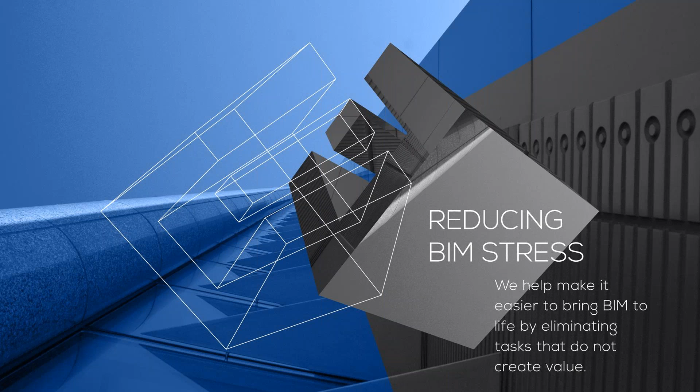The main focus of our company is to create software for continuously accelerating BIM based on the experience of the most advanced users, and with those solutions we're reducing BIM stress by eliminating tasks that do not create value. How do we do that? Today you will see two different examples. One is pretty new: openings for the structural framing category.

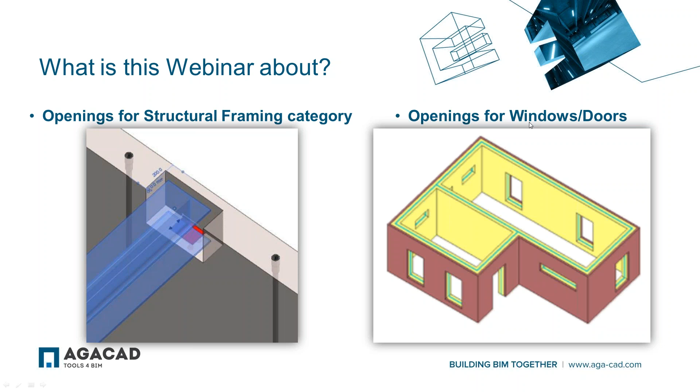We are cutting the edge of making things in BIM. I will also show you the workflow for openings for windows and doors when you have two different models, structural and architectural. Today I will use only one of our solutions, but it was just updated a few weeks ago, and you will see the brand new features.

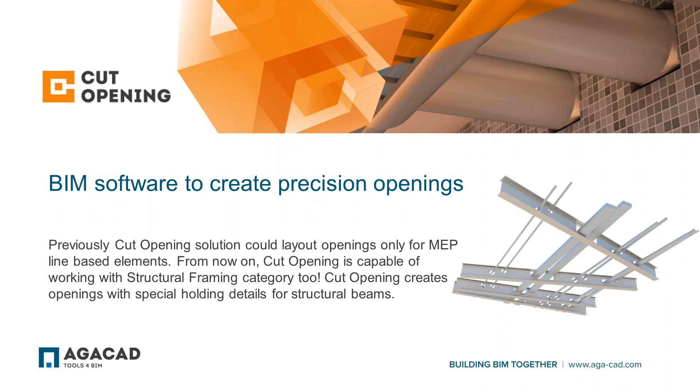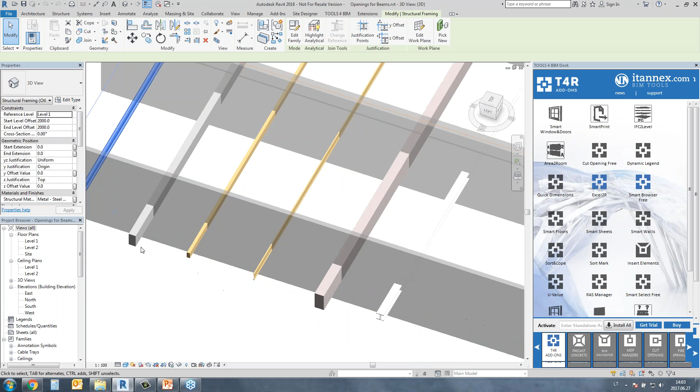I don't want to speak about everything literally, so I'm just jumping into Revit, and this is what we have. Right now I have a model that consists of several walls and different combinations of beams. At the first position you can see that I have different beams: metal beams, concrete beams, some wooden beams, steel beams, etc.

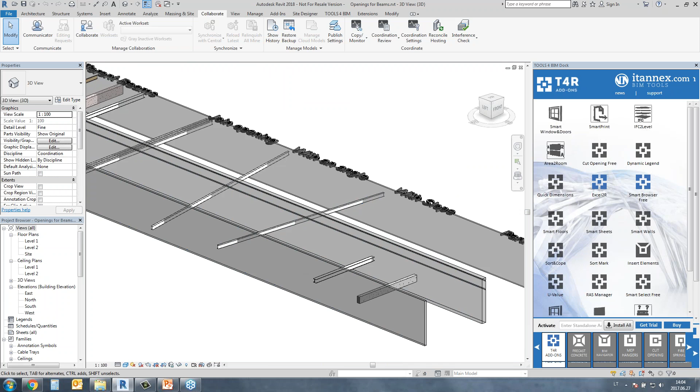So different beam combinations. Again, I have beams that are near to each other, so I would like to join the openings for all of them. I also have some inclined beams, some sloped beams, as well as some beams that have partial interference.

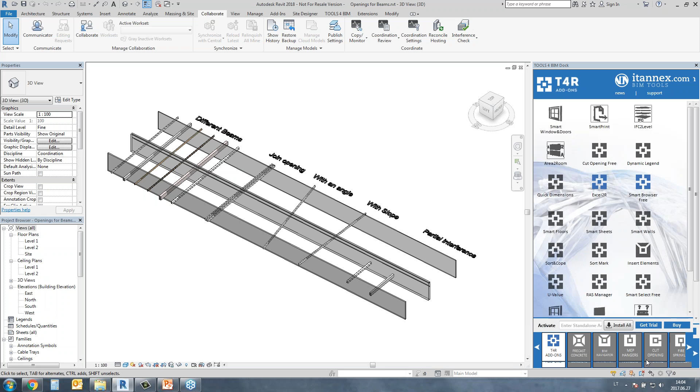That means they are not going fully through the walls, but they are just reaching the wall, and I have to place the beam over there, and I have to place the openings for this reason. So in this case, AGACAD has developed the tool and feature in Cut Opening to place openings for beams.

So the workflow - maybe some of you are familiar with how Cut Opening works, and somebody is not familiar. So I will repeat everything step by step to make sure that you can try it on your side. The very first step is to run the interference check between walls and beams.

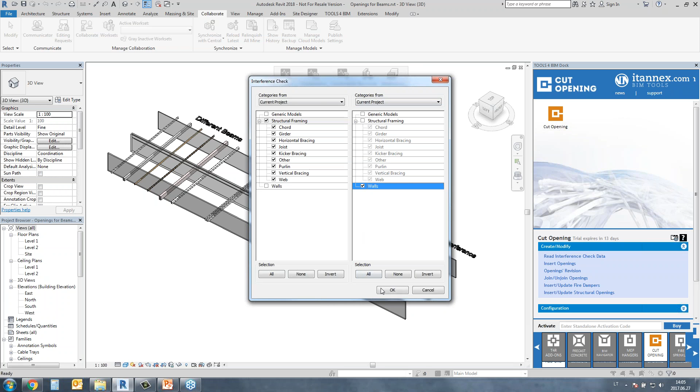I'm using Revit's interference check. On one side I'm choosing structural framing, on the other just simple walls. I'm running the clash detection, and if I select something, you can see in the model that those elements are highlighted. I'm simply exporting everything as an HTML file, which Revit gives to us, somewhere onto my computer.

The next step is to prepare the configuration side. In the configurations, we have different line-based elements for which we can open the openings: round and rectangular ducts, pipes, different pipe systems, cable trays, conduits, and the last one, but not the worst, is the beam. This is a brand new feature to place openings for beams.

Inside the configurations, we have three different possibilities. The first one is the cut offset, or to be exact, the opening size. We have two different methods of applying a size for the beam opening, and the first method is to apply cut offset.

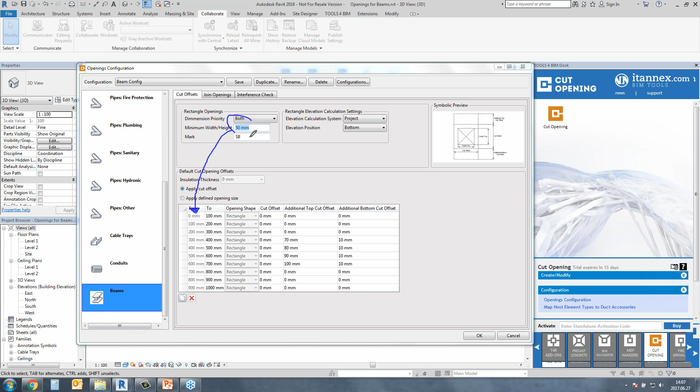The openings will be started only from 50 mm, when the beam is bigger than this size. So you can do some configurations about the size of the beam.

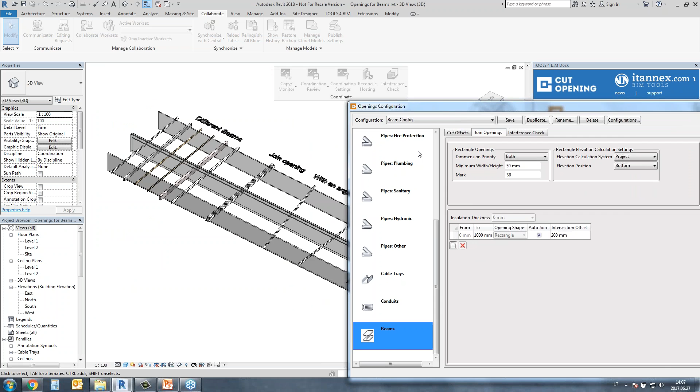Another thing we can do is joining openings, as I showed in one of my examples here. We can auto-join an opening for several beams that are near each other. This is the size, same idea - you can add some sizing if needed, and ask the software to auto-join the elements if they are near each other by some distance.

The last one is interference check, for when a beam is just touching the wall. The question is, should we make the opening for such situations or not? Another thing we can suggest is the depth offset - the opening could just go to the end of the beam, or it can be extended deeper into the wall. Such configurations can be made inside.

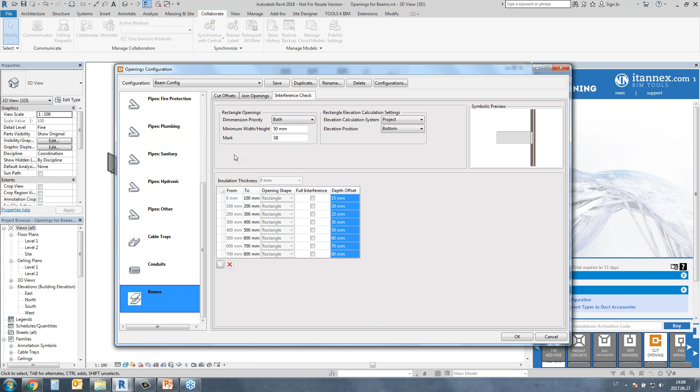The configurations can be saved. As you can see, I have lots of different configurations for different situations, and I'm just saving the beam configuration.

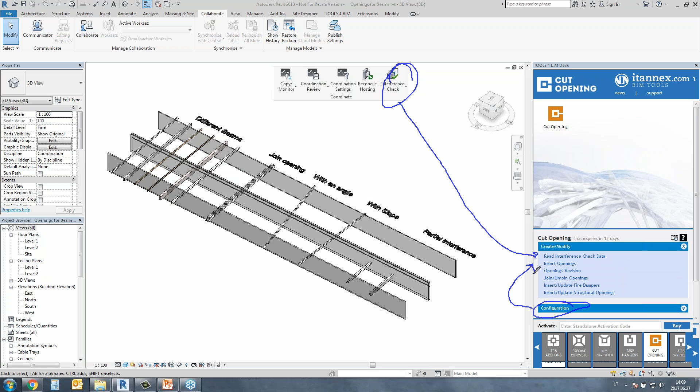The third step is to combine those two things - I'm combining the interference check from Revit and the configuration from AGACAD cut opening, using the simple read interference check data possibility. I'm selecting the HTML file taken from Revit clash detection, and taking our beam config from the cut opening.

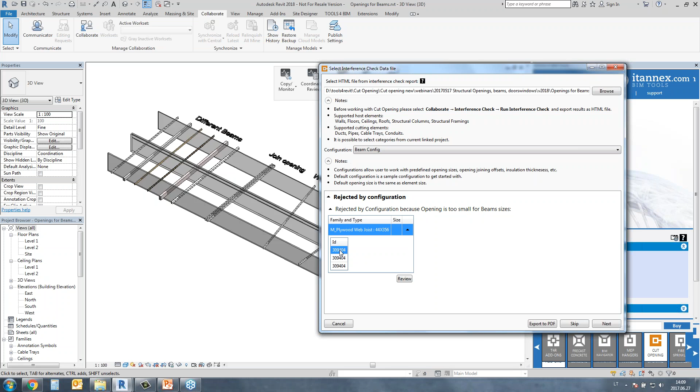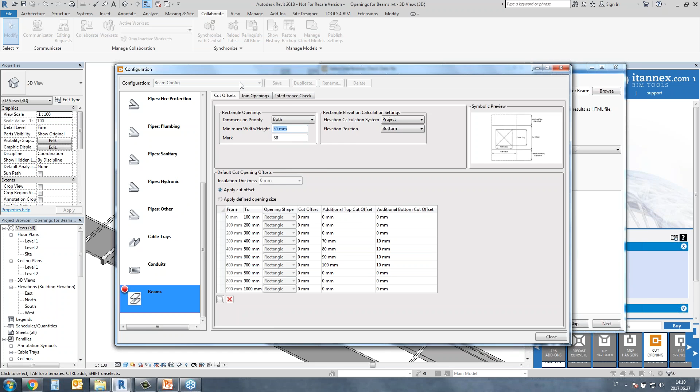Automatically it detects the elements that can be rejected by configuration. As you can see, this one is rejected because it's too small for the opening. It cuts everything and shows you where you're having problems or troubles, so you can review it and go back to the configuration to check some red bubbles that lead you to certain places. This 50 mm mark indicates that the element is too small for the opening to be placed.

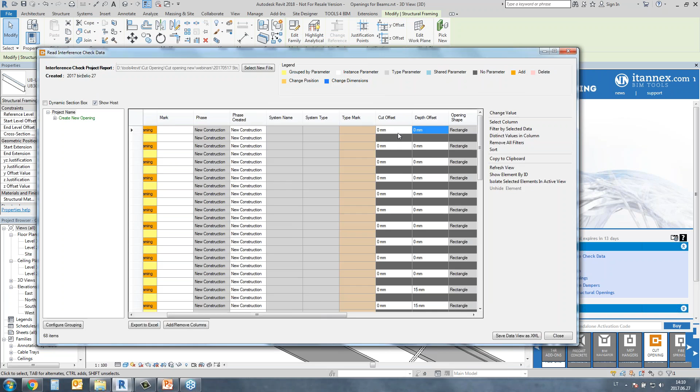I agree with this rejection, so I'm clicking next, and I get some values. Right here I have the table where I can specify the size once again if the cut offset is okay, and I can still see the elements inside my Revit - my Revit is still working. Let it be like this.

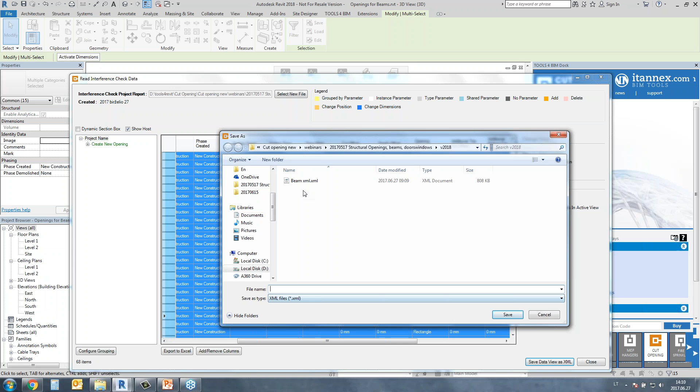I don't want to change anything here. I just want to leave the cut offset at 0, and the depth offset at 15 mm, as it was made in our configuration. So I'm saving this as an XML file, combining two different materials - one is interference check, another is configuration. I saved everything, and now I'm going to insert openings for such elements by taking the XML file.

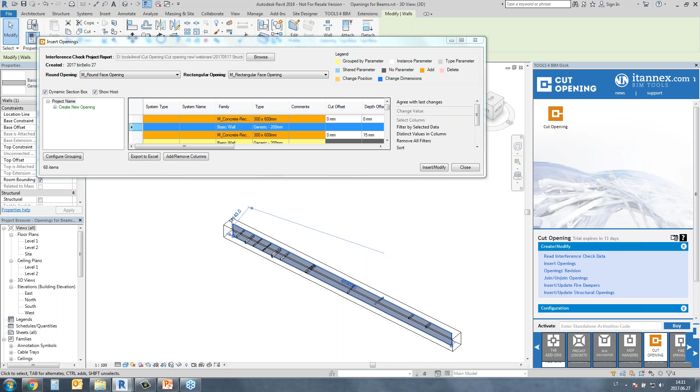Once again, I have the possibility to take a look at my elements that are clashing somewhere. So I'm taking this element and I see the clash. I'm taking another element and I see the clash. I'm taking the third element and I see the clash. So you can just review all the clashes.

There is a possibility to change the cut offset depth and all the possible material in this table. As well, you can choose the family. In my case, I'm choosing just the opening family, but as you saw in my example, the opening can have nested families inside, with some plates or handling elements that can be placed together with the opening. Those elements should be nested inside of the openings.

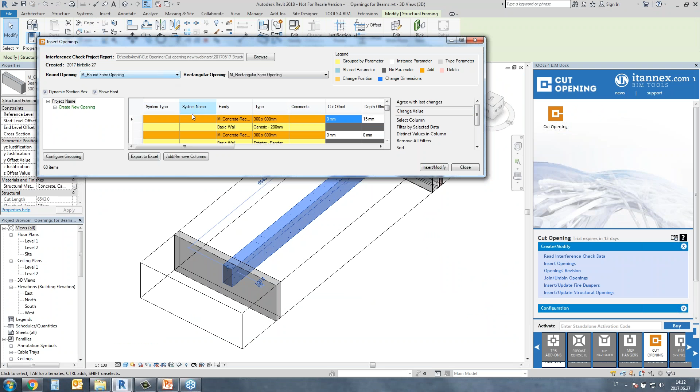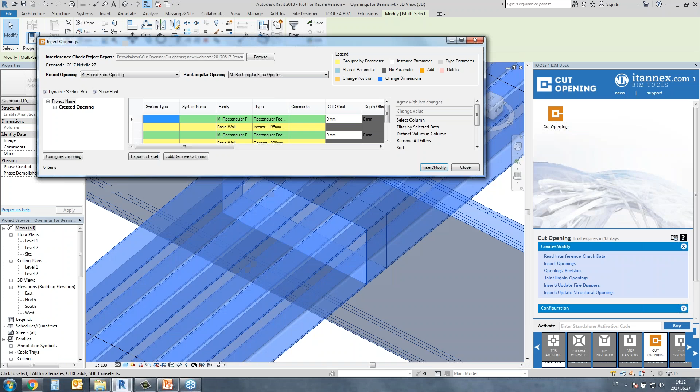After you've checked all the stuff over there, you can just easily press insert and modify elements, and the elements are inserted by the tool. So I have 32 elements inserted right now, and they are somehow auto-joined, and I'm clicking OK, and let's take a look how our solution did its job.

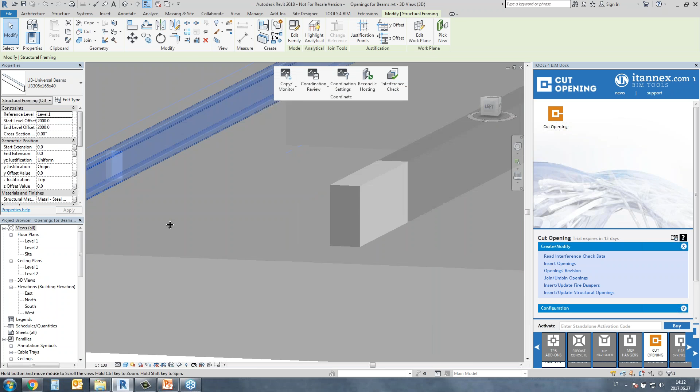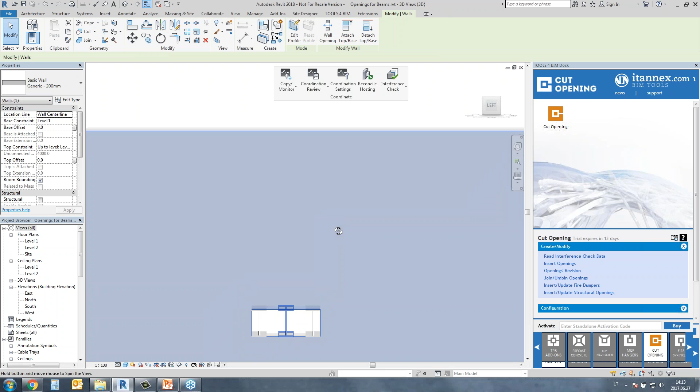So we have a metal beam. Inside of the beam we have some special parametrics for width and height. For the steel beams we're taking the width and height, for these elements we're taking just H and B parametrics, etc. As well, we have auto-joined beams, auto-joined opening for 3 beams, as you can see here. I can take this one and easily find that all of them have only one opening. The same situation is with the slopes, angles, and the last one is with the partial interference.

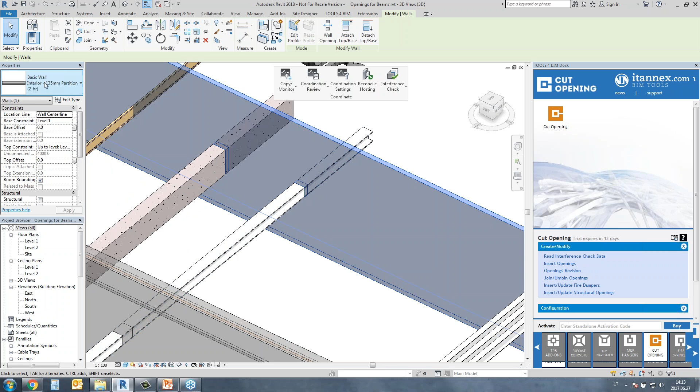That is the most interesting one for structural engineers, not for architects. All these elements, openings, are basically for partitions, they are for architects. But then it comes to the partial interference, we can see how it looks from the plan views.

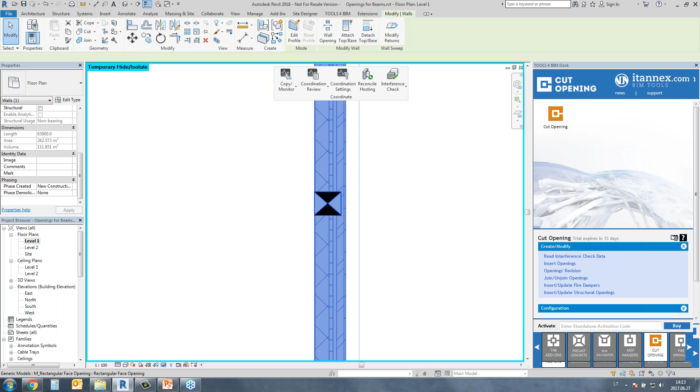You can see that we have the opening here. I can still manage some parametrics right here, like I can change the depth offset. As you can see, I can just hide this one. We have some markings over there. We have the marking over there again. So everything came from just our family, as you can see. So just you can use that.

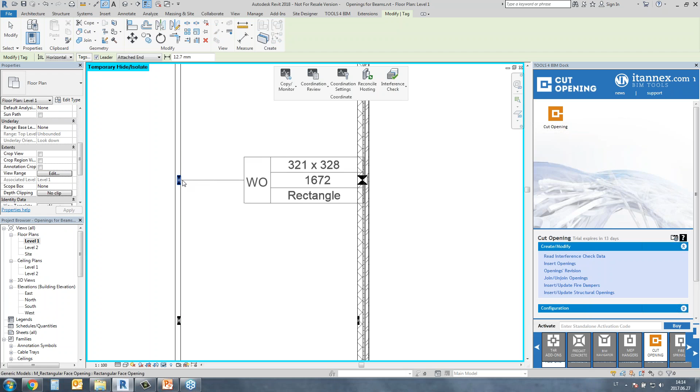What we can do more with those elements, we can tag them. So I have a tag, a wall opening tag, and I will tag those elements. So as you can see, what do we get here? It's the size of the opening, it's the elevation of the opening. This is a rectangular opening, and we have a marking that is WO, wall opening.

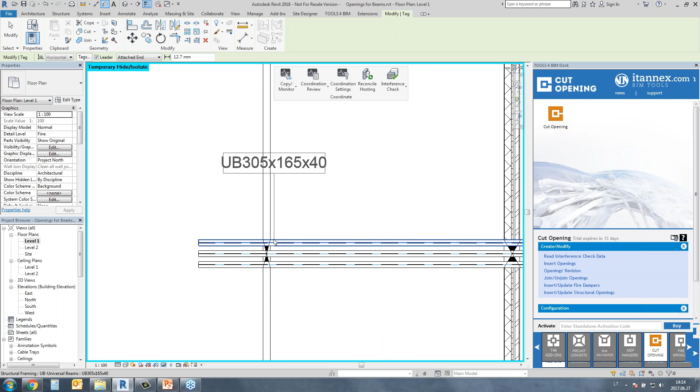Again, I can mark another one, and maybe that is, oh, not the one I need. Yeah, so as you can see, I have another elevation, another sizes, etc. So all these openings can be scheduled, can be tagged, and can be used in various situations that you have.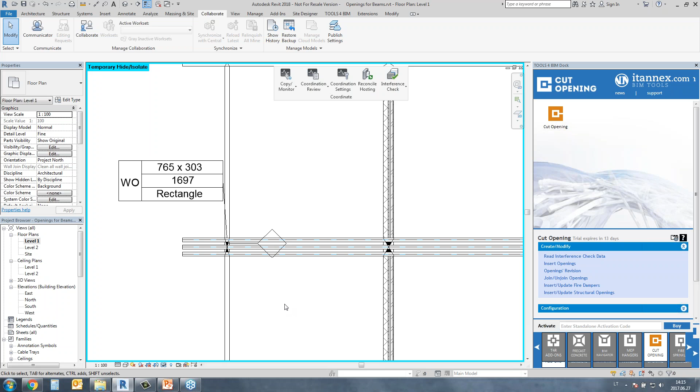The same workflow is applied for ducts, pipes, cable trays, and conduits, but today we're speaking about structural things and about the structural beam openings. So that is the final result, what you get. It's the openings for different situations for beams, the tags, and as well we can prepare the schedule for generic models.

We can take any parametrics from those generic models and use that here. As you can see, we have everything like depth offset, some family names, width, host, who inserted, what kind of configuration was used, the insertion date when the openings were inserted, as well the opening area, it's rounded so it shows 0, but it can be found. Opening elevations are calculated, the level where they are placed, etc.

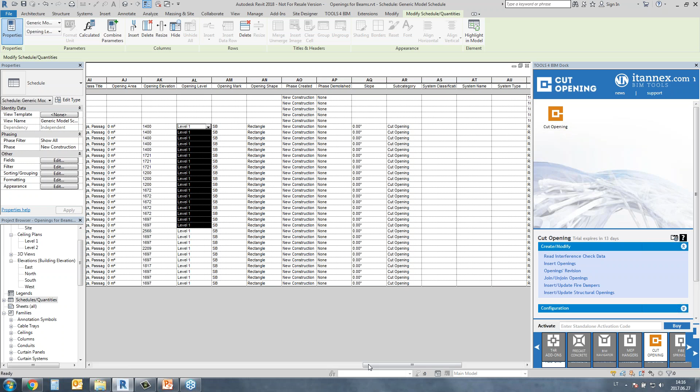So lots of information like width, type, are described. You can easily prepare your builder's work, drawings with tags, with schedules, and the drawings as well. So this is the first theme that I wanted to speak about. We already spoke about openings for structural framing category.

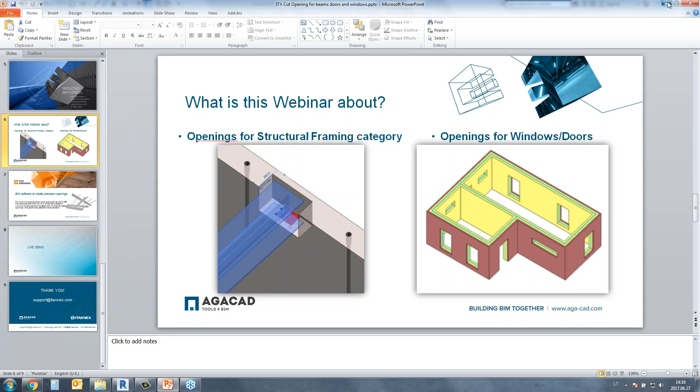Another theme is about openings for windows and doors. Then we have linked architectural model. Just one little thing that I forgot to say.

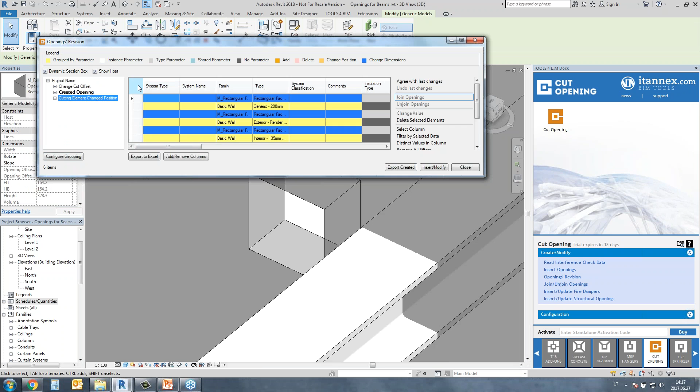For example, if you move the elements left or right, if you change the size of an element anytime, you can go to opening revision, and it will find that we changed something, so we can agree with the last changes, and all the elements are just popping back. Where is that moved element? Yeah, it's right here. Let's move it one more time.

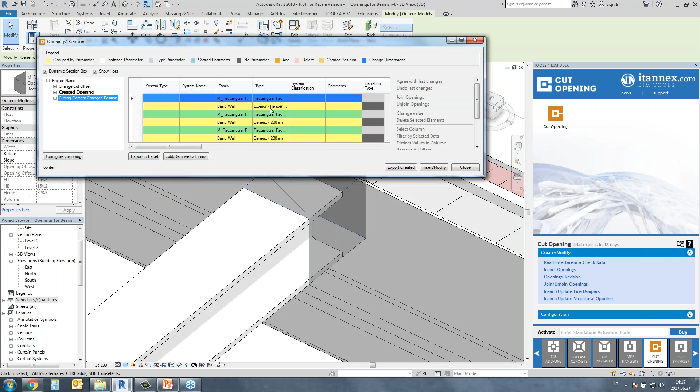I moved it here. I'm going back to openings revision. I have this one, I'm agreeing with last changes. Okay, voila.

Let's take a look where it is now. Yeah, so we changed the position. As well, easily we can use join functionality just to join the opening into one big opening, etc. So we have lots of possibilities here.

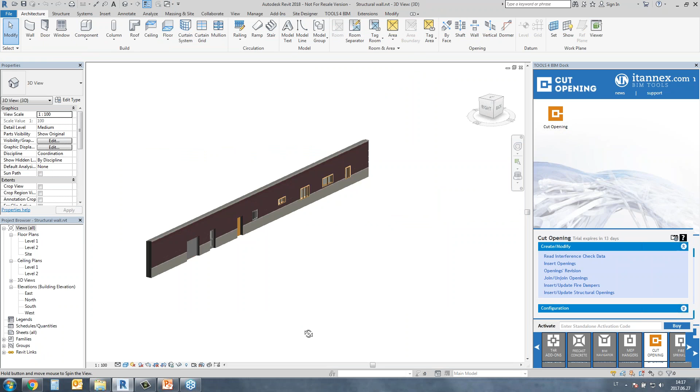And right now, finally, I'm switching to another project of mine, the structural walls and the architectural walls. So this is a bit of another theme. This theme is very popular in the Scandinavian market. I'm not sure about yours, but I feel that you sometimes have such projects, where you have the architectural wall in a separate file.

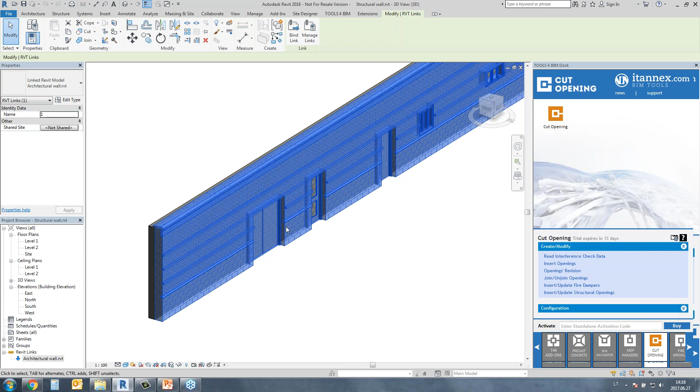As you can see, this is my Revit linked architectural model. And this model contains all the windows and doors, and on the other side I have a wall that is current, a structural wall that we as structural engineers are working with.

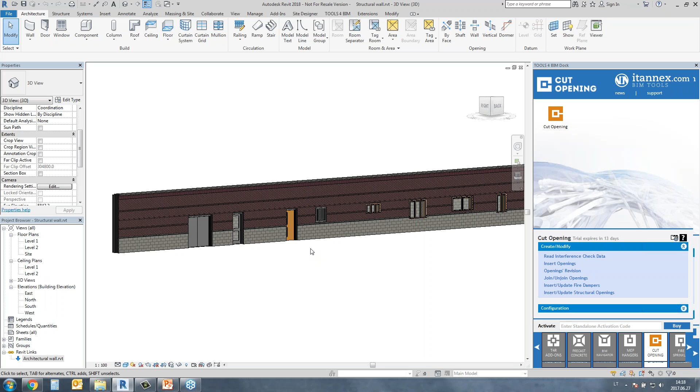So we have to have those openings for doors and windows, but then we have such a workload we don't have the openings here. So usually we just use manual work to cut openings all around the windows and doors, but today I'll show you one really nice example to insert structural openings for those elements.

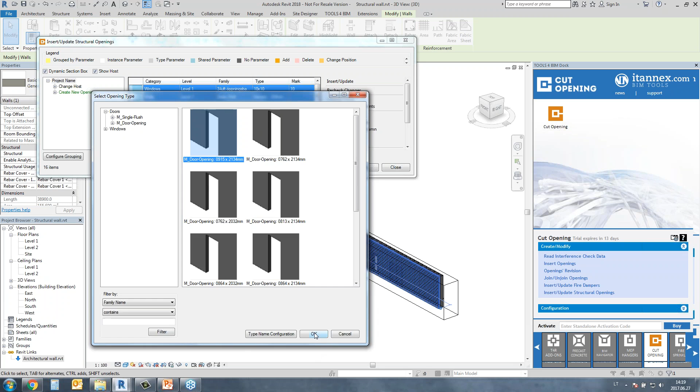So again, something similar, again the table that is highlighting elements inside of your project. So I'm taking all of them and I use the insert update feature, and I'm taking just a simple door opening that was created by Autodesk. It is in your structural or architectural templates. Those openings are placed, so they are not our families, they are your families, and I'm clicking OK.

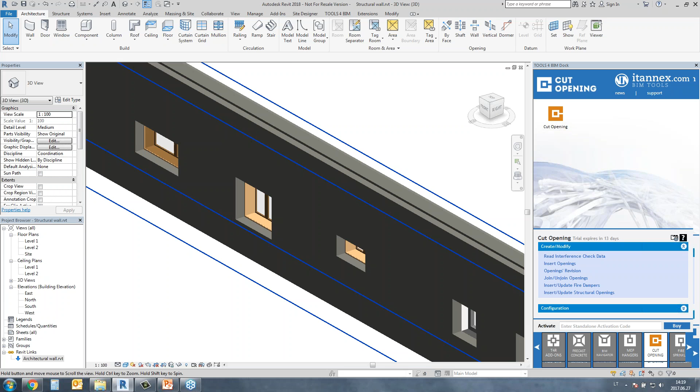Okay, and once again I'm taking it and I will place windows. I'm taking the window. Okay, and let's take a look how this was made. As you can see,

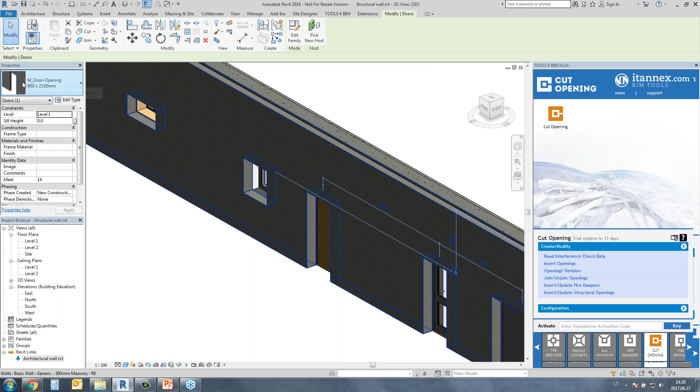We have openings for all the windows that are placed straight in our architectural model. So the size of our opening is the same as the size of our doors. So I can take a door opening. As you can see, we have such openings. Yeah, so if we move something, the elements are moved together. So let's save this one.

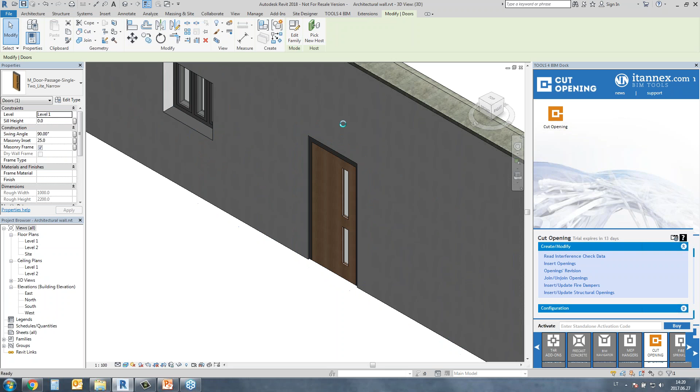Let's close this file, and I will open the architectural wall right now. And for example, I'll move this door just to the right side, and I'm saving this, and I'm back into my structural model.

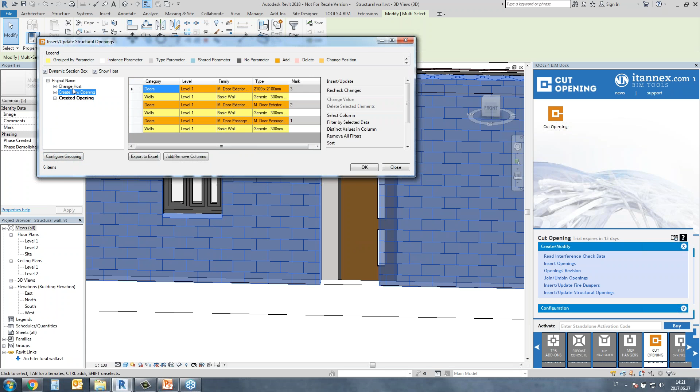Yeah, and as you can see here, we're having some trouble because our door was moved, and I'm going just to insert update structural openings. I'm taking all of them. Maybe change host. What's going on?

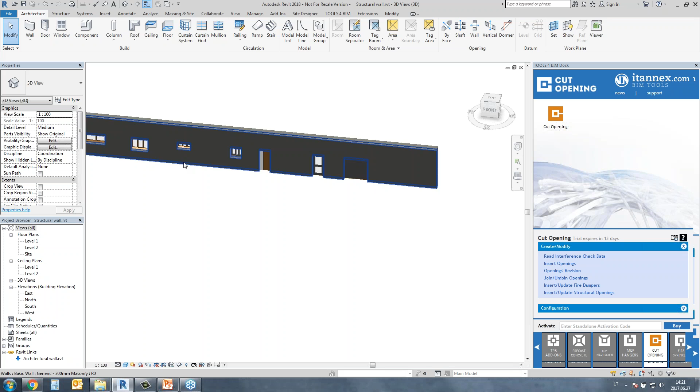Okay, not this one. It's insert updates. You don't see - maybe it's the wrong link or something. Let me try to delete them. And okay, let's insert openings for it - change host. What's going on?

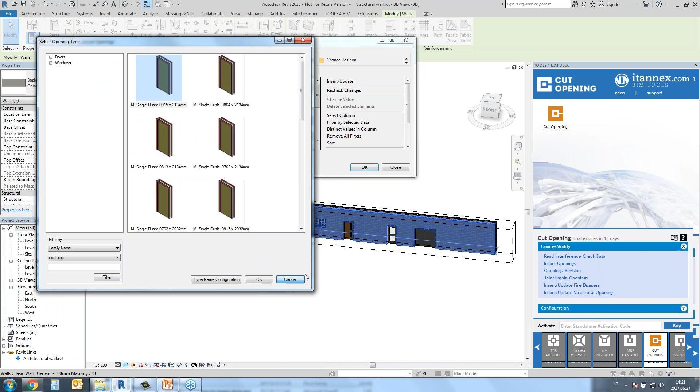Okay, let's try to place doors only. Okay, so I have the door family straight right here where I need them, and I think the update should work somehow, but it doesn't want to work right now for me. I can try once again, and I will finish.

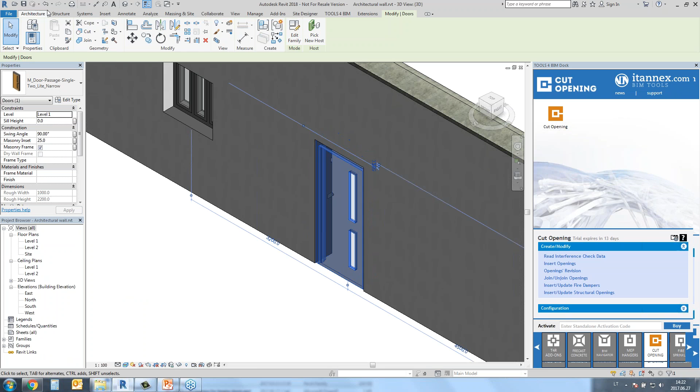Okay, so I'm saving this. I'm going back to my architectural file. I'm moving the door. I'm saving this. I'm getting back to my structural file, and okay,

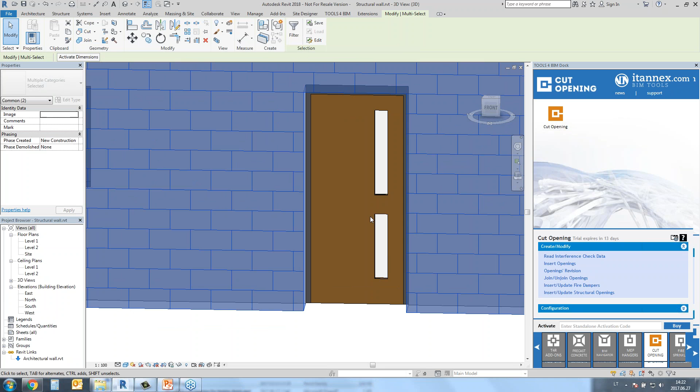Yeah, so we change the position. Finally, I get that. So I just move them back, and as you can see, the doors are just straight at the opening, or the opening is just straight at the door opening. Maybe I had some problems with links. I don't know why this disappeared.

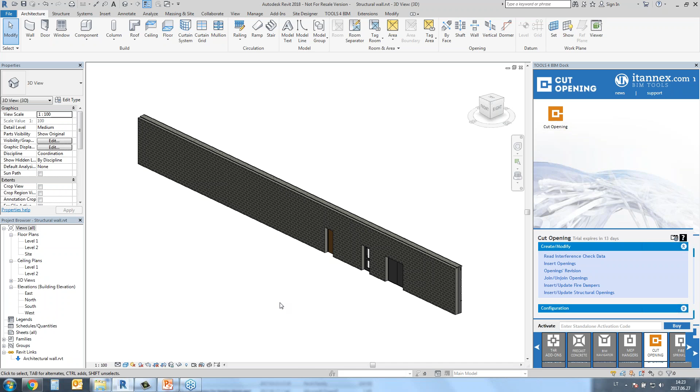Yeah, so that's the idea how cutting openings for doors and windows can be applied, and what kind of workflow should be used to make openings in structural walls when architectural walls are linked. Yeah, so that's the idea, that's the workflow, and I would like to say a big thanks to all the attendees, and I would like to say a big thanks to Annalise.